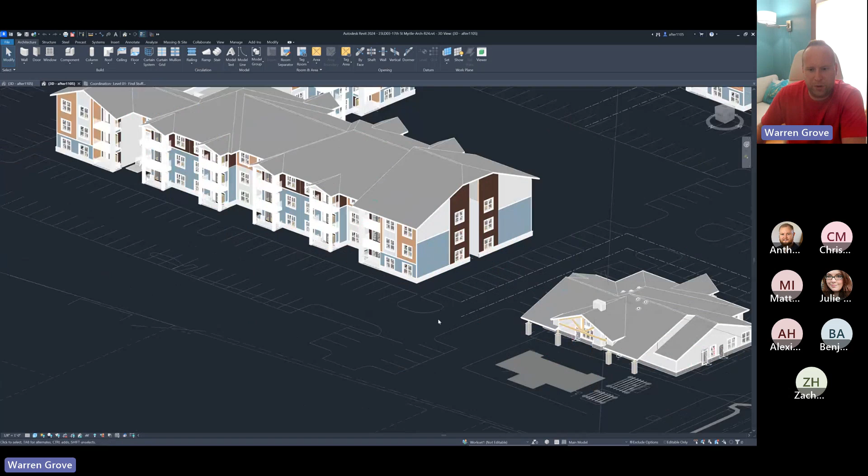Perfect, let's go ahead and dip in. So we've got groups for units. We keep an inner layer that is the interior guts of the unit, and on that we build the first floor. Then we build an outer group that includes the shell of the group, meaning the exterior walls, exterior wall finishes, windows, and porches. I think I've said that right. Yes.

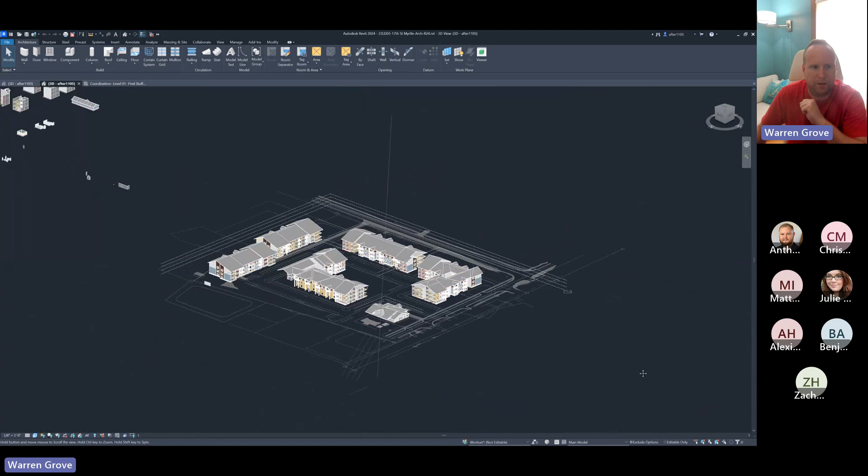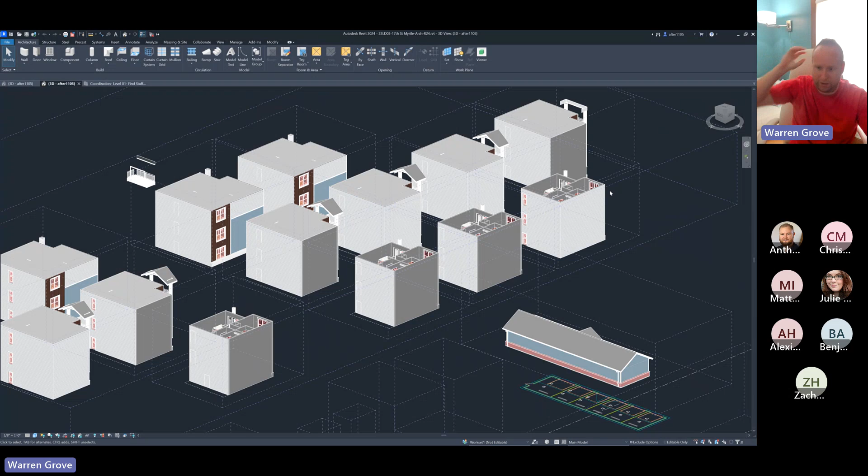The essence of that - if we were to, I've got my scope box on... no I don't, right. So if I were to ungroup one of these stacks, you see we keep every single unit as a stack - the ADA units, the standard units, any modifications to those original units, which we'll get into in a minute - everything should remain in a group. Another way of saying this, less politely, is don't explode the groups.

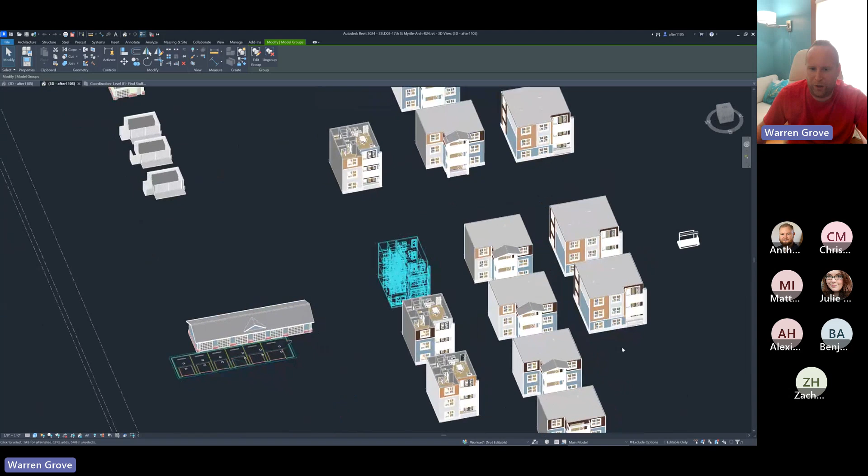No breaking of the groups ever, ever, ever, ever, ever. In fact, we like to usually tell people when they start to not muck about with the units at all. That's the project manager's job, to understand the rules and laws associated with those units. While that's correct, it's still important to be looking out for things that couldn't possibly be right. If you see anything weird, let's talk about it. Don't be silent, always say something.

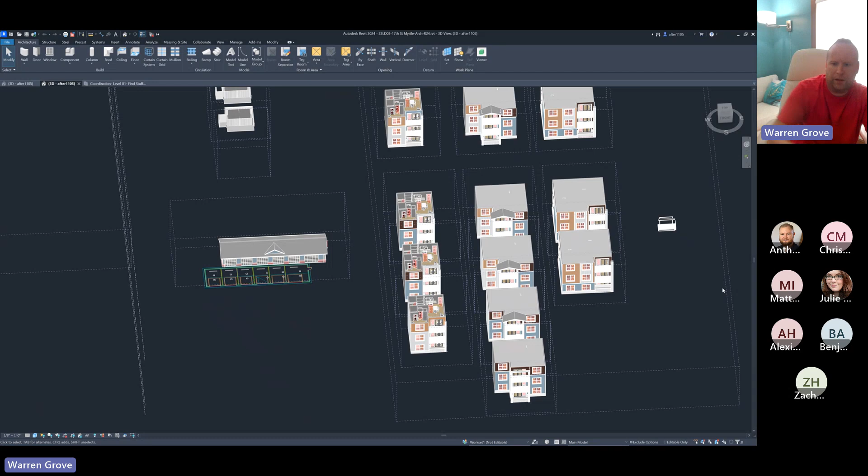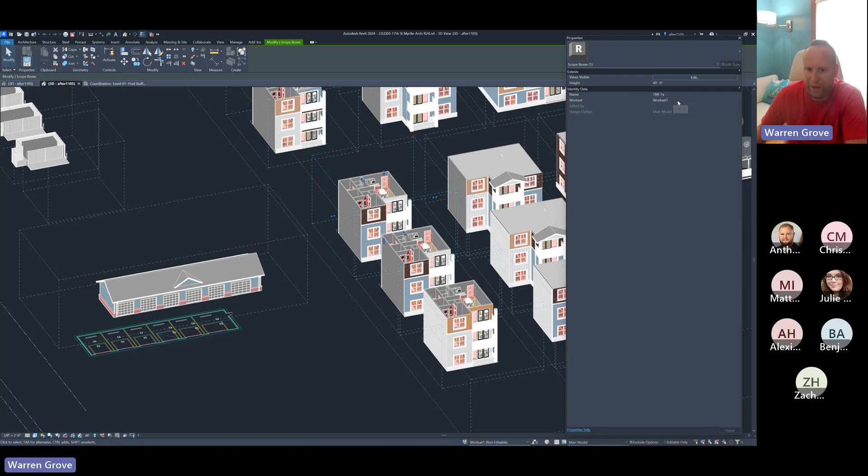Sometimes you'll probably be asked to do another group. So we have scope boxes - are you familiar with scope boxes? I'm assuming you are. Sorry if this is a bit reductive, but we want to make sure we don't miss anything, since everybody comes in with a different level. Gosh, do they ever, and you never know what holes are there. The scope box name - one of the big things you'll find out is we want the unit name and the scope box name to match. We just don't want a bunch of different names for what is the exact same thing.

When we build these units, the other thing we try to really make sure we're coordinating is the insertion point - that's this X and Y little guy. I don't know what Revit actually calls it, but you can move it around. Insertion point, perfect - we like the origin point. We'd like, in a perfect world, the origin point to be

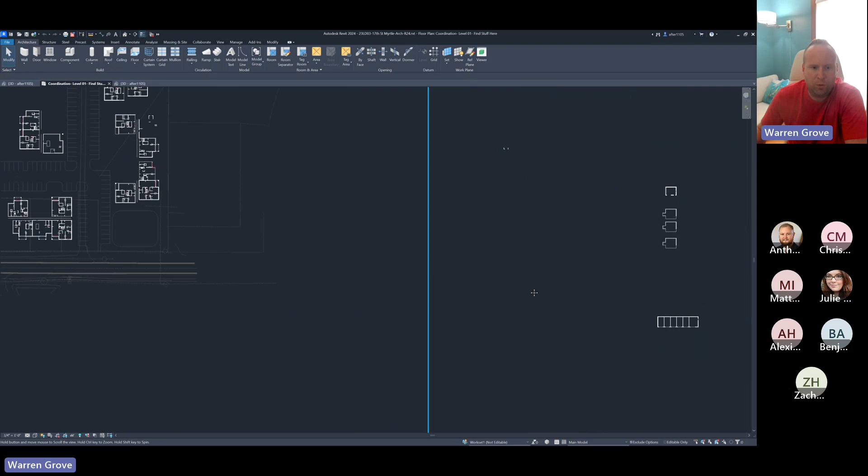the same point wherever possible, whether I'm doing a corridor building, garden style building, or townhome - it doesn't matter. The idea is really simple: if your origin points are all the same, it makes swapping out stacks of units super, super easy.

So let's say that this unit, for whatever reason, I actually wanted it to be a 2D. Ideally it would not move at all - we'd just be able to swap in a 2D unit, and that unit would change at that particular location. To add to the origin point, you also want to make sure your axes are pointing the same way - the arrows, that's right. You can mirror these units when building the buildings, but as long as you start with the X and Y all being the same orientation, it should be good to go.

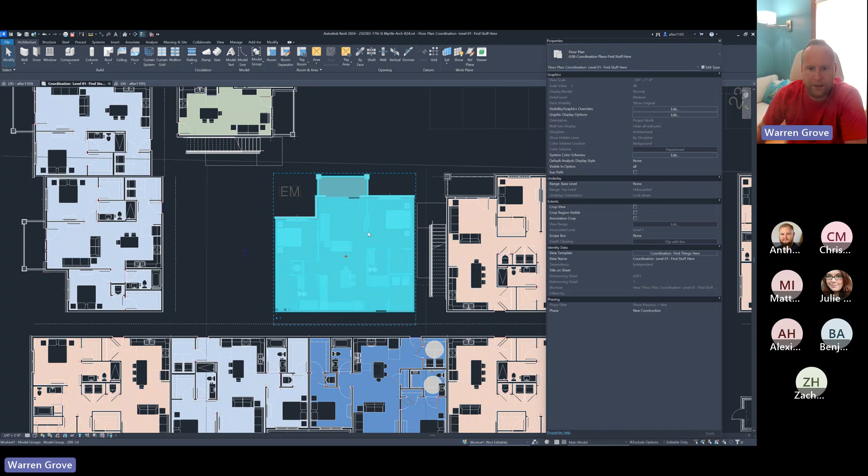See, there you go - and that's now a 2D unit, but it should not have moved at all, which is perfect. So I'd put that back as a 2C. In fact, I'll go ahead and just undo that now - don't want to break the current model we're all working in.

Other things I like to see with the units - you might notice some dashed lines. Those are important, especially when you're building corridor building units, but they come in really handy even when you're building a garden style unit.

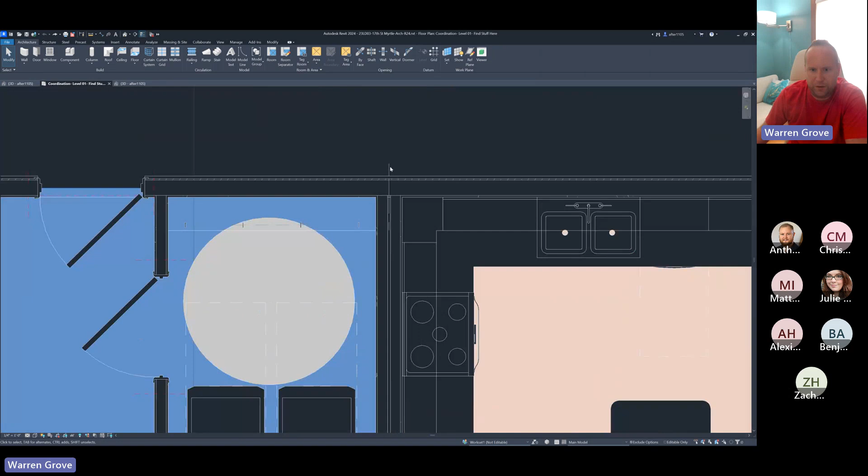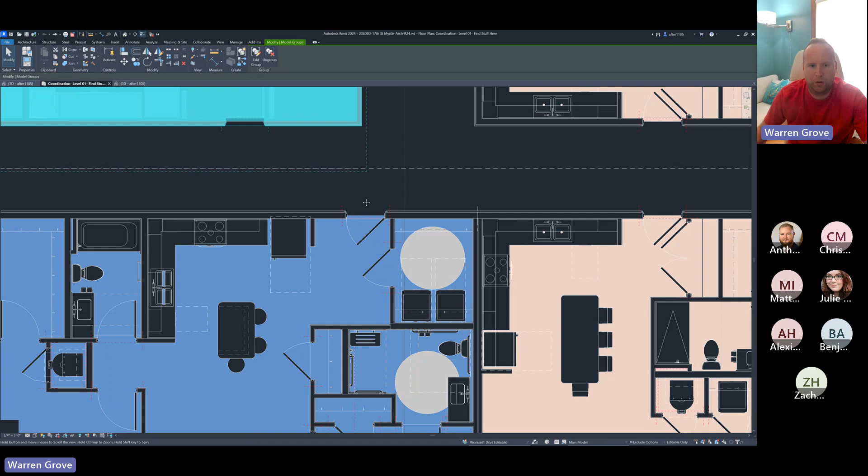You'll see these little tick marks, little vertical lines. We want those to stay where possible. For our wall type, we build these at 1 inch apart, so having that mirrorable line is great. I also do one when I build a corridor, having a mirrorable line right down the center of a hallway, so I can visually see if something's not lined up. It makes it much easier to see that, so we avoid potentially having mistakes as we build.

I hope it does. The reason we do it this way is inevitably sometimes things change. You need to move a building around, and the way the corridor teams in our office do it, they basically ungroup a lot of these groups for a variety of reasons, none of which are good when you think about it long term, but they do it. Then when it's time to move the thing, when the owner wants something different, it makes it so much harder to move everything.

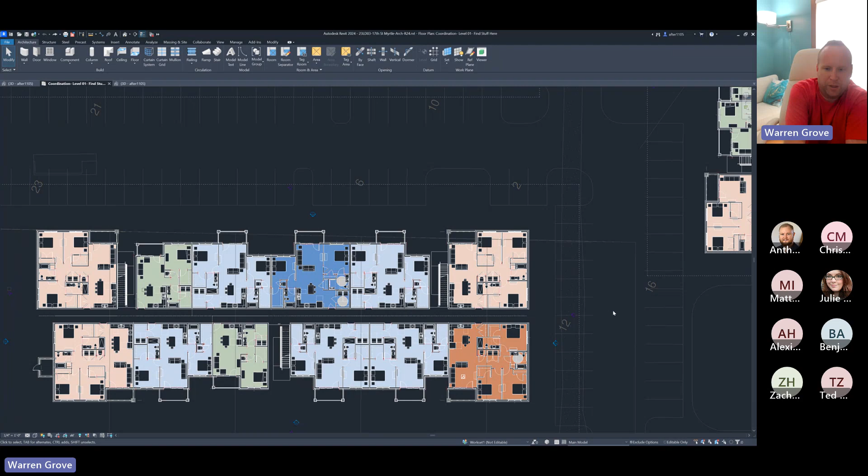Right now I can just click and drag these things, and not only does the stack of units, all 3 floors, 4 floors, whatever it is, move, but the trim, the siding, everything goes with it, which is wonderful. It makes pivoting possible, even better than it was in AutoCAD, because then the elevations are half drawn for you already. That make sense? Yes, it's very useful.

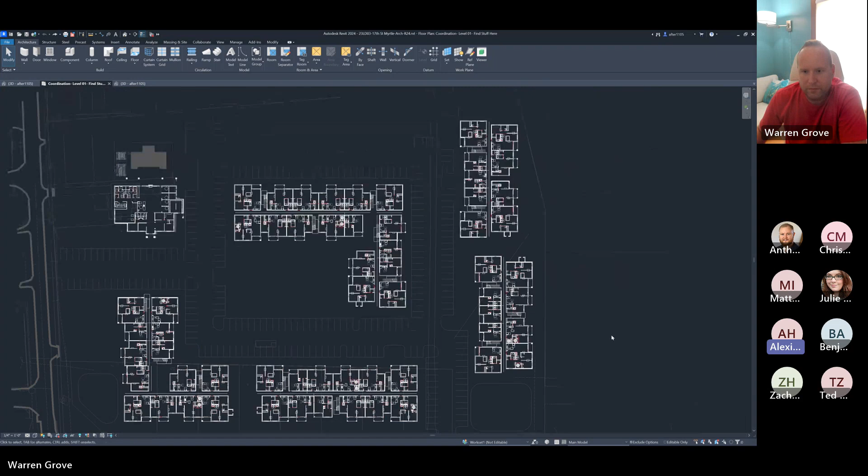I haven't seen that done before. It's just one of those rules of thumb that they expect everyone to know at my previous firms, but this is a lot easier.

I think the challenge is people don't like doing this because they've had trouble getting the groups to be stable in the past, and that stability issue is caused by a variety of things. We've learned, in particular, we had issues with the tile floors in the bathrooms. We got rid of those and all of a sudden stability returned to one of our models. So we've worked very hard to identify pieces and parts that cause these units to not be stable and not work the way they should, and gotten rid of them.

Been a years-long process. Chris hasn't suffered at all.

If you're running into problems, the best advice I can give you is just stop, think about it, and call one of us, let's put our heads together and figure it out. But I'd say like 75% of the time, it's a face-based or wall-based item that's in, say, the interior group, but hosted on a wall that's outside of that interior group, which you can do, but it's tricky. We try to avoid it when we can.

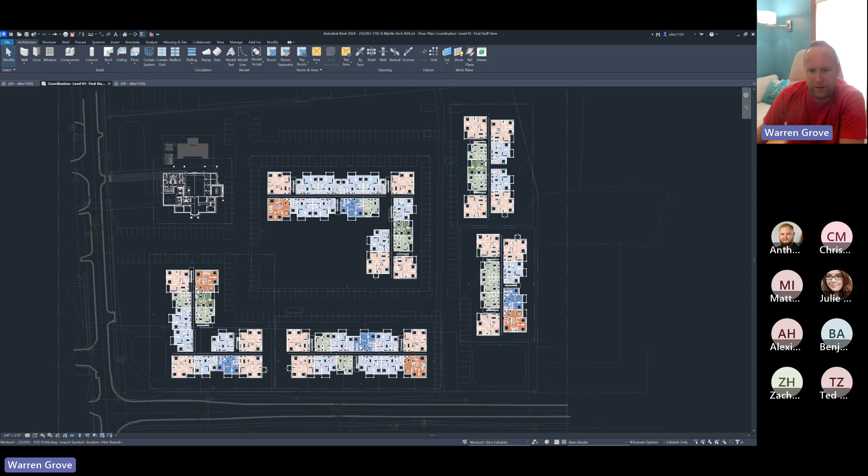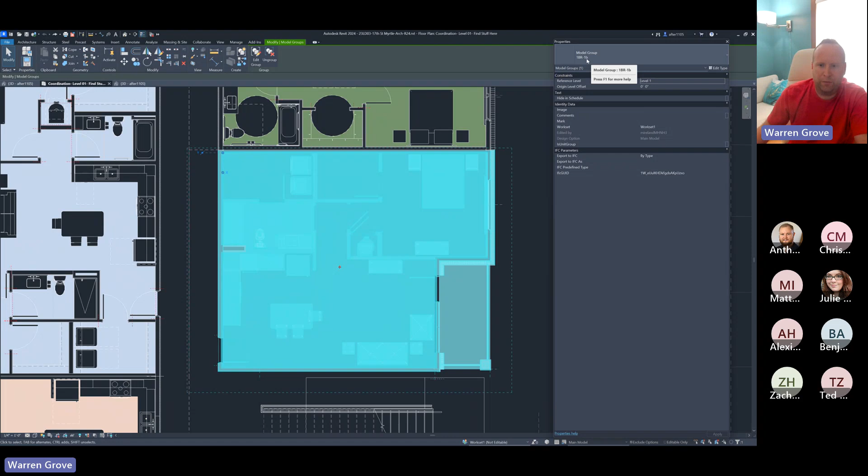100%. So let's talk about how this draws up before I forget about it. So this unit, this is a 1BR-1b. We'd like to keep it always the same, where the lowercase letter tells us something very particular. What it's telling me, ideally, is that the interior guts of the unit are exactly the same as a 1BR-1 lowercase a or lowercase c or lowercase d. The naming convention is super important - it just means the interior guts of that unit have not changed. For this one, it's pretty self-evident what's changed: this wall along the living room is a 2x6 wall because it's an exterior wall facing a breezeway with a stair.

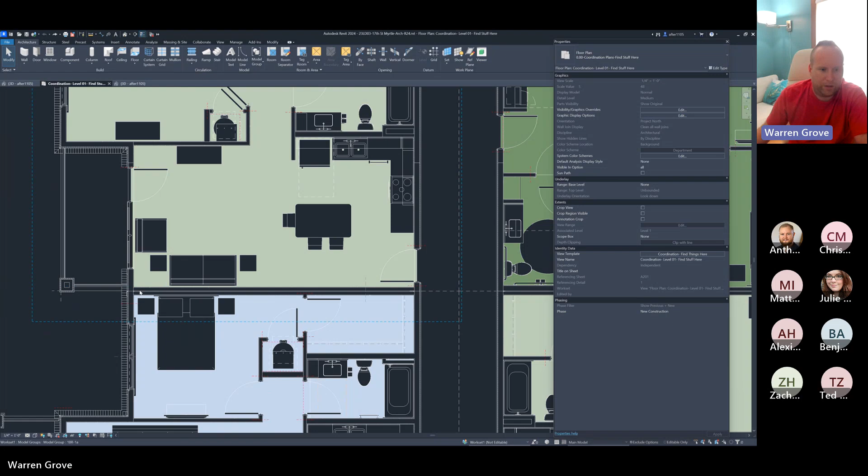As opposed to - I probably won't be able to find a 1BR1 unit. Yeah, here we go. Here's a 1BR-1A where it's a 2x4 wall, a demising wall separating units, which is a rated wall. You can see that that's changed - that's the only change. And that's super important to us, that the names should tell us a lot.

And it's super important to us because then we can do clever tricks when it comes to the drawing package, like this - we know a 2BR-2 versus a 2BR-1 based on the naming convention. Of course, this is doing something a little bit different, so bear with me, but the essence of it is we know the guts are the same, so instead of drawing it twice, we just refer back to the one unit, which is here.

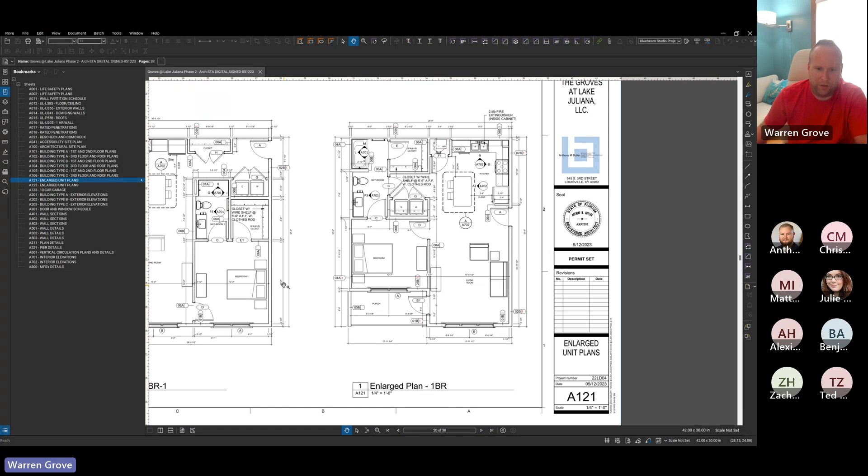So we cut down on a whole lot of errors. And then we only go through the process of tagging the exterior walls or the exterior conditions, which is what has changed in this particular case. Sure. Does that make sense? Yes.

Okay, and this is important because it's not that hard to just group everything and have it live in both unit plans. It should be relatively easy. But the day those two unit plans become 99.99% the same and not 100, we get questions, and that costs us time. You know what I mean? Right, so it's easiest just to have everything done correctly in one place, and that saves on coordination.

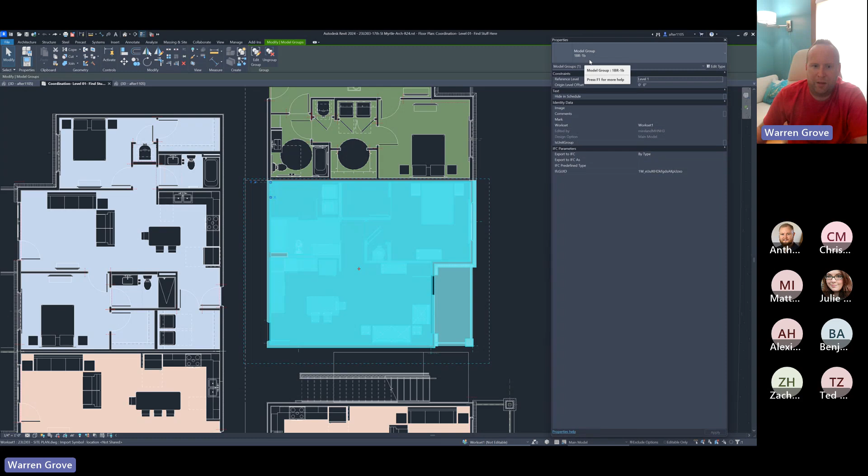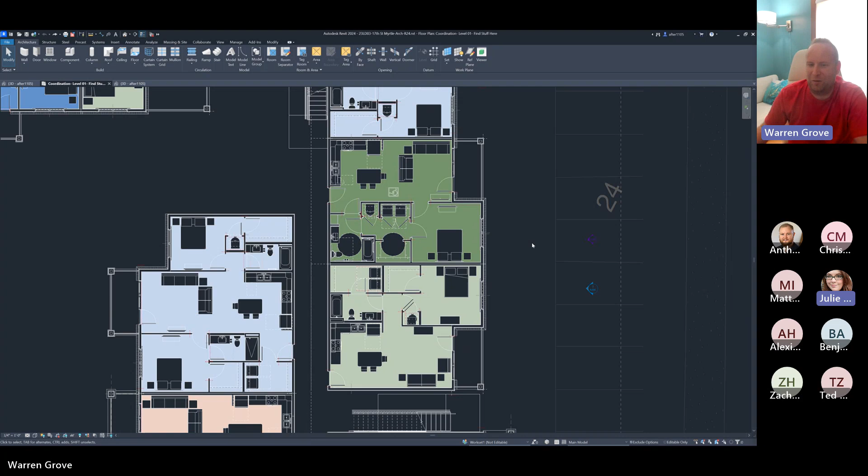Correct. And I think the flip side is true. If for whatever reason we knowingly change the inside of this unit, then the naming convention should change. As you work in the firm, you'll get used to how we name things, and you'll intuitively know without having to investigate what I was thinking when I made that particular item. In a perfect world, it will work every single time without fail. There will be no exceptions to that rule whatsoever.

Promised. Let me ask you a question about this stuff.

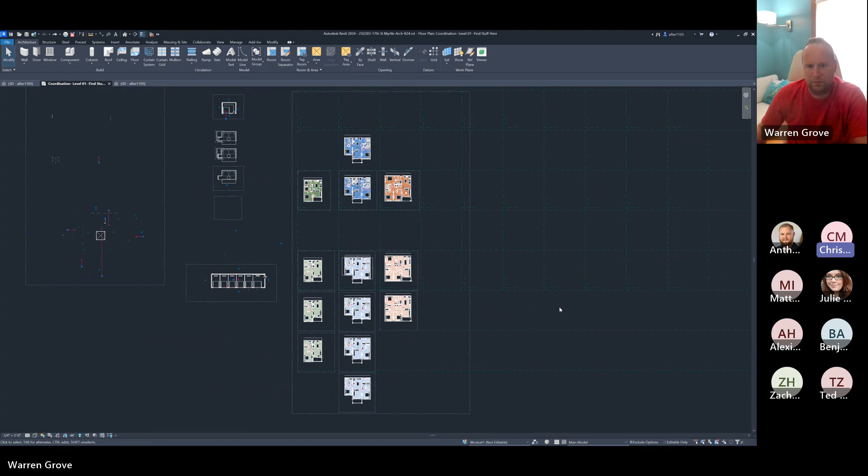Can you show me your layout here? Yes. So you're gonna have, okay. I'm guessing the top four up there are what you have actual unit plans for, and the bottom however many are just sort of modeling. Right, so the way I'm dividing this up, these are the three core competency units, and these are the three ADA versions of those units. And then everything below it is useful for building the actual model, but doesn't actually show up in the enlarged unit plans insofar as the core.

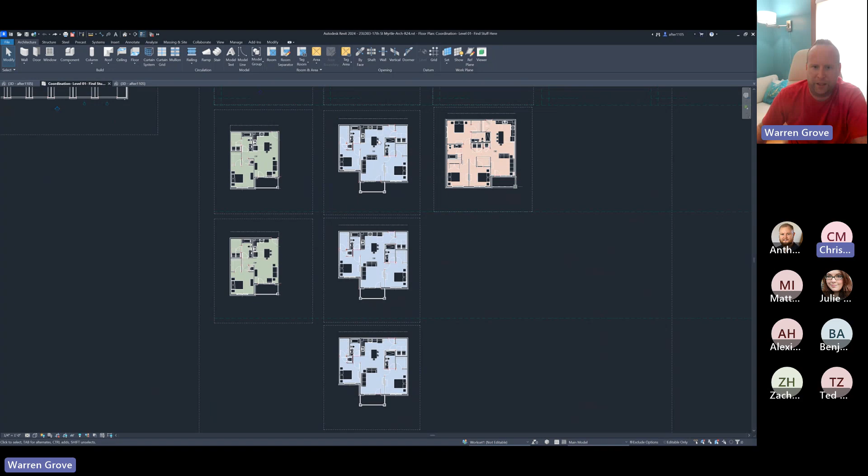Yeah, that's basically how we started doing it too. I think Ben moved them to the right instead of right below, but I actually don't care how you set up your layouts, just so long as... me neither. I do care about the colors though.

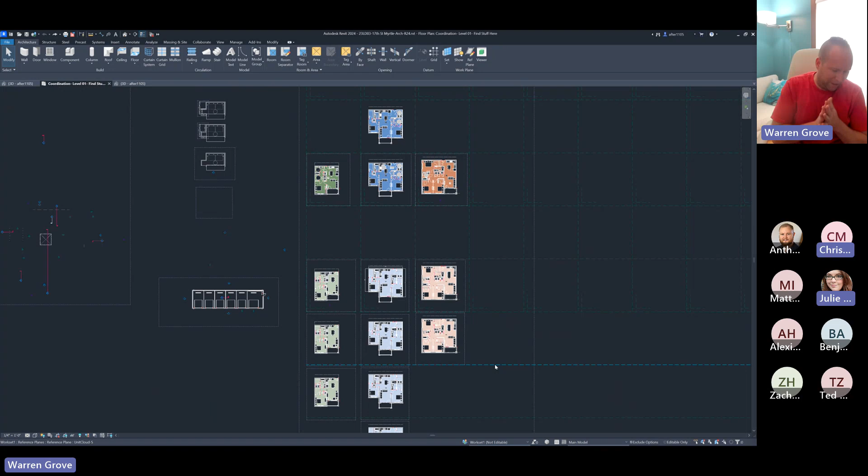You probably noticed there's, we'll call it green, blue, and what did we call it, Julie? Dead salmon. Yes, hey now, that was my term. And it's a beautiful term, it should forever be enshrined. Who made fun of me for that in a meeting with you and Vadim? Was it Michael Gross, somebody? Somebody abused you maliciously for things that had nothing to do with you, and it was the greatest day ever. Yeah, right, but I digress. Chris took it. No, we won't. The point is what we're losing, we're reining it back in. Sorry, we're bringing it back. No, if we can't have fun, there's no point.

The essence of the teachable moment here is that it's probably already self-evident that the 1BR accessible, the 2BR accessible, the 3BR accessible, however many there are, to help it pop on the page and be easy to understand where they are and how many there are, is a derivative of the color. We just want to darken whatever that color is for that unit, right? And all this is handled with color schemes on the coordination plan.

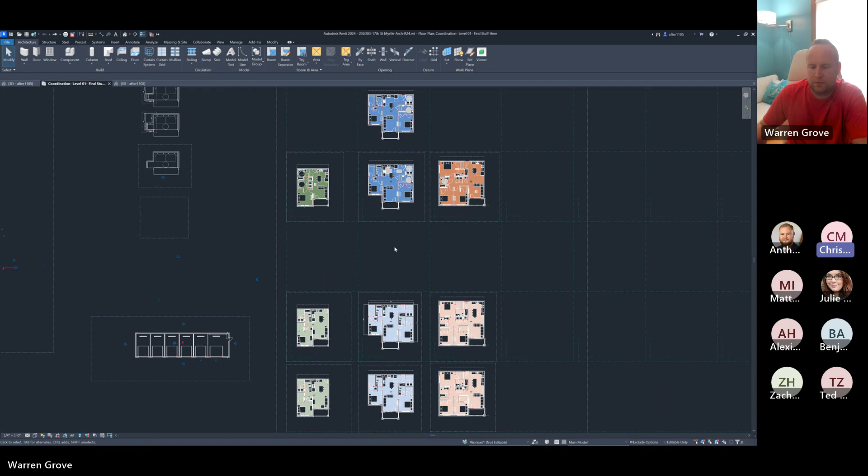Yes, yes, yes. And then most of the time they'll color the room, not the tag, the room. We'll set a department for when we add those rooms into the units. And you modify and check that by going into the view template, clicking on color schemes, and then it'll be under the room subdivision, should be called department color scheme. It should all be right there. And ideally this is all already set up for you, and you don't have to worry about it, it's just sort of automatic.

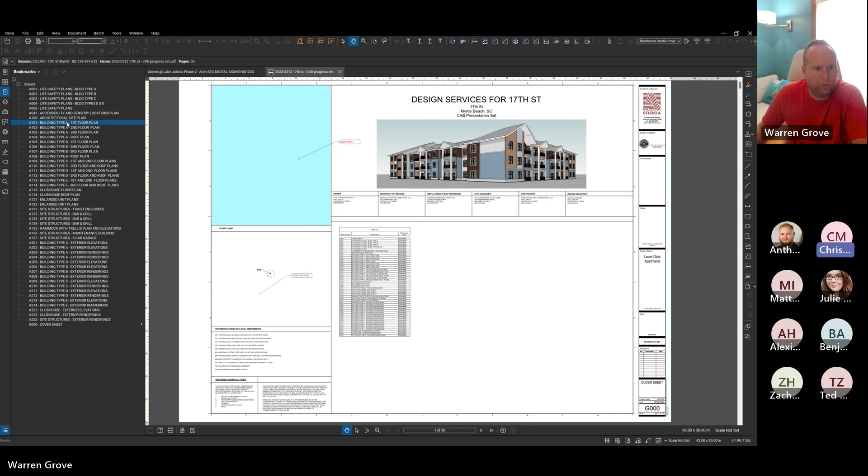So here's a good application of it, right? This is what we used to do for several years, just the good old black and white. And we're trying to get away from that, trying to do it even on standard garden styles. Yes, even on standard garden styles. Thanks for telling me. I think it's gonna print gray whenever anybody prints it, but the world... yeah, I agree. That's why historically we didn't do it in the past, because it would print gray.

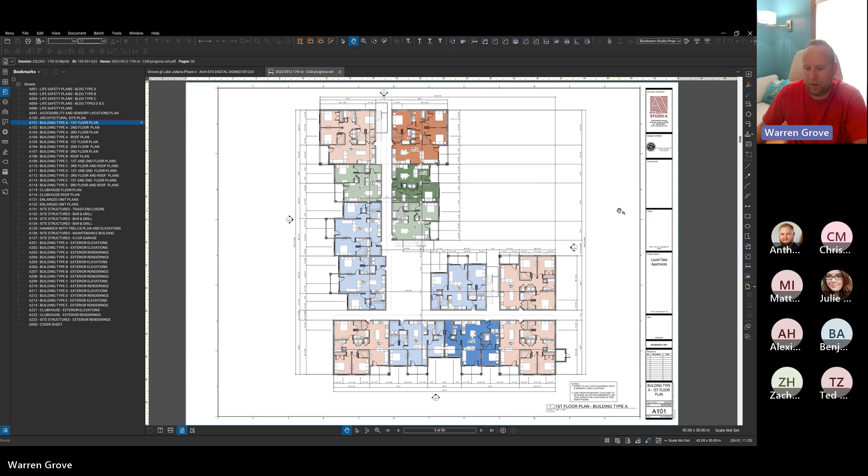But the more we do this, the more people are just in Procore anyway. Yeah, so that's fine, and this is a good moment.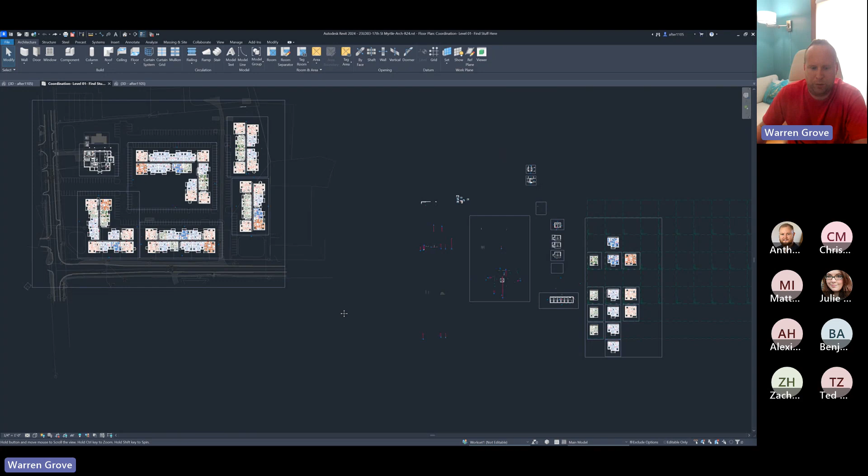While I have this up on the screen, this is a common question: how do I keep from having 10 million different versions of a unit? How do we keep it simple? The simple answer is jobs - do simple jobs, don't have 10 million unit plans. And then job number two is hacks.

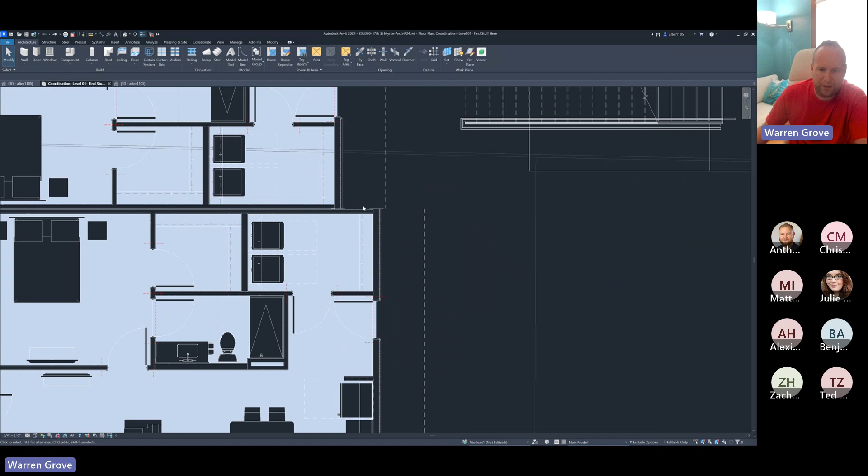You probably noticed that this unit and this unit are pretty much identical, except this has this 2x6 wall down here. When I have little jogs like this, instead of creating an entirely different unit for something with just a little niggle of a bump, I'll just let this be the same unit, and I'll draw a 2x6 wall over it and tag it in the overall floor plans. I won't go through the trouble of making an entirely different unit type for 2 feet of wall or whatever it is.

Same for this little guy, I'll just make a big deal out of it on the floor plans. As long as you're communicating that clearly to the contractor - hey, do this little nib right here, make a note of it - then you're going to be fine. If you don't tell the contractor, that will get us in trouble. So it's a decision we've made, that we're just going to pay attention to it and get it right. Make sense?

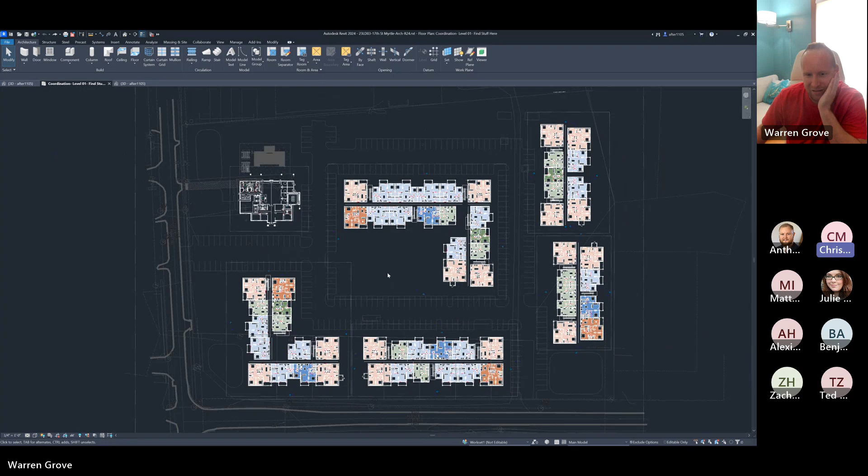Drawing is like writing sometimes - there's a number of different ways to say what you want to say, and some are more clear than others. But at the end of the day, you're just trying to say what you want to say and communicate what you need to communicate to get the job done.

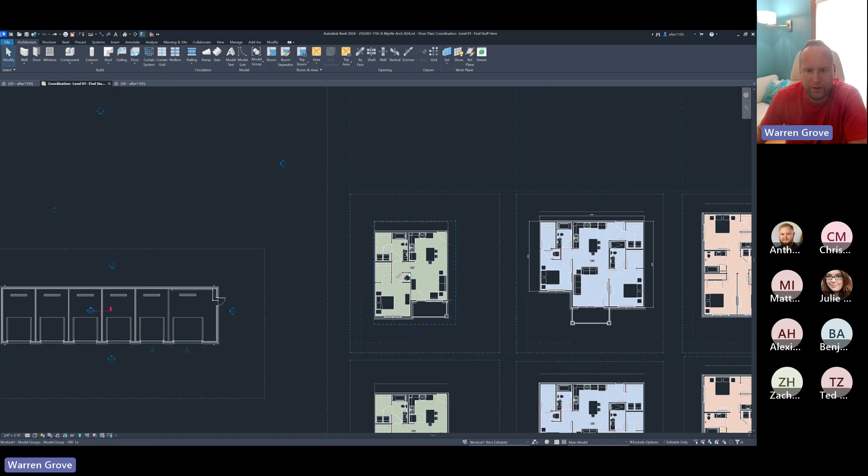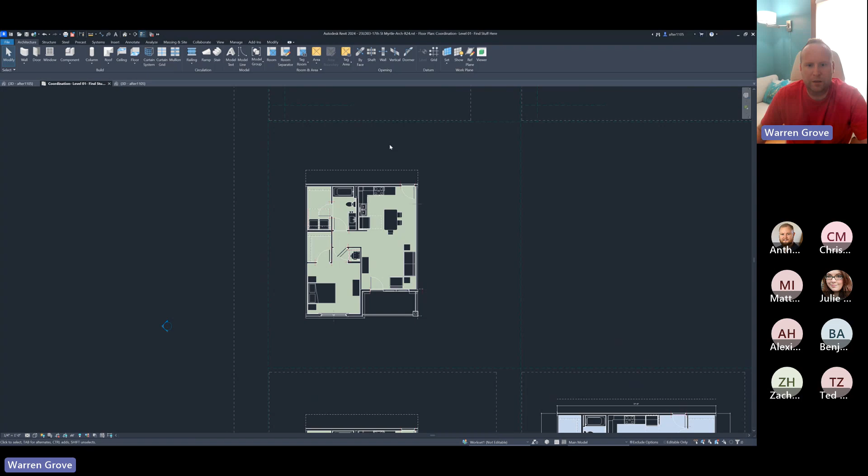Final-ish things - I think I've said this already, but if not, I'm going to break one of these groups just to reiterate this. Give me a second, I don't want to break this original one. Go up here and do what we said we never do, which is ungroup. And now you can see that interior group. I just want to make 2 points.

First off, this is the 1BR interior - you'll note that name, that's how we like to name that, keeps it simple. And it's a big thing for me that the apartment door, the patio door, the entry door are part of the interior group. That's a huge thing, absolutely.

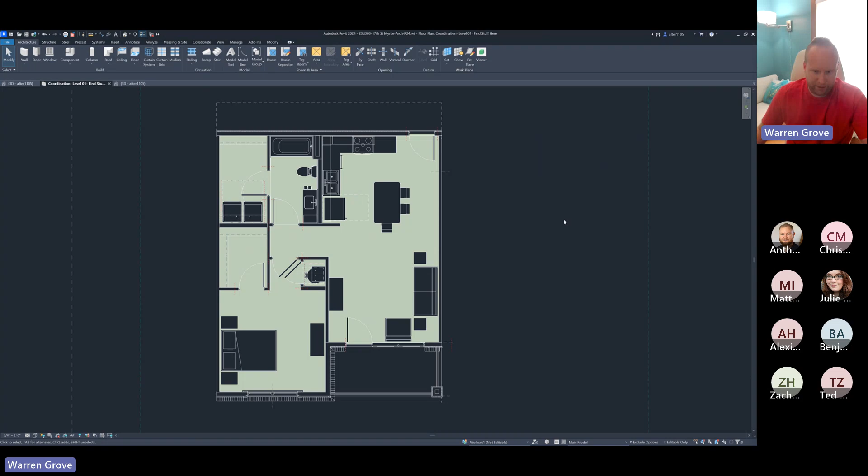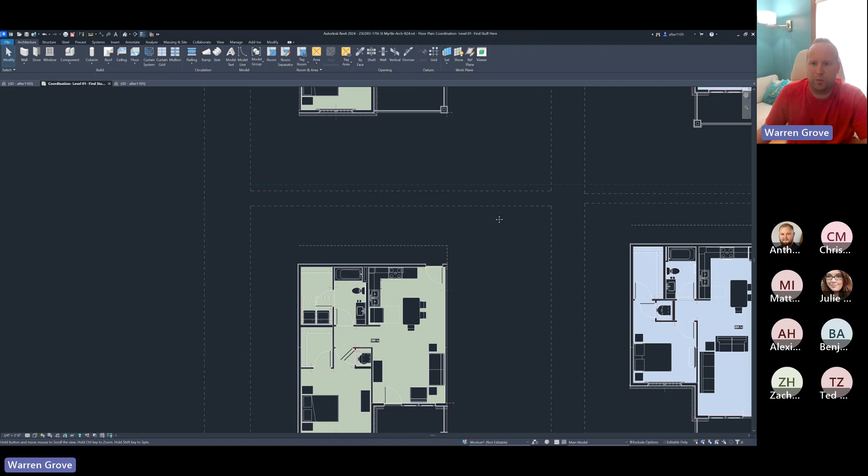The reason I want it like that is that if it's not part of that interior group, I get constant issues where the enlarged unit plans, which show this group, don't match potentially the swing of the doors for the outer group. Or somebody changes one of these outer groups, either consciously or unconsciously, and then it becomes a conflict in the drawings. The general idea is that the units on the right need to talk with the units in the building on the left - they need to be the same.

You can see here, now that we've ungrouped it, we don't do a stack of 3 - we don't do groups 3 layers deep. This just gets copied up, so here's, for however many floors, and then that gets all stuffed into your exterior group. And then again, we do the trim as necessary.

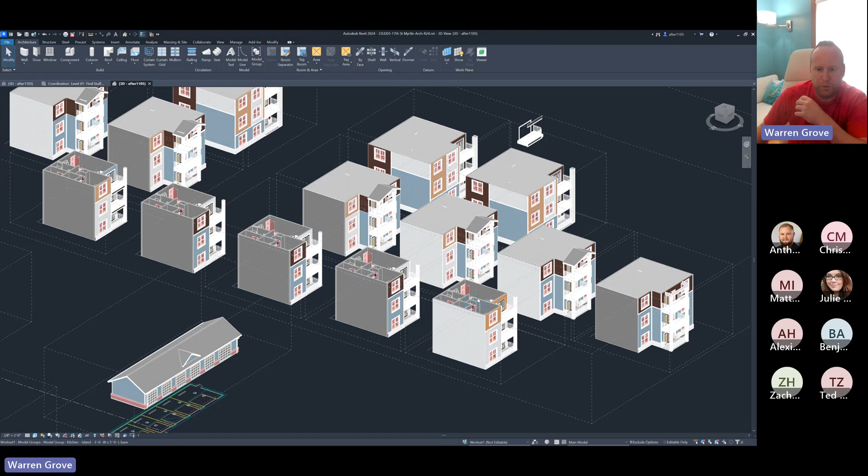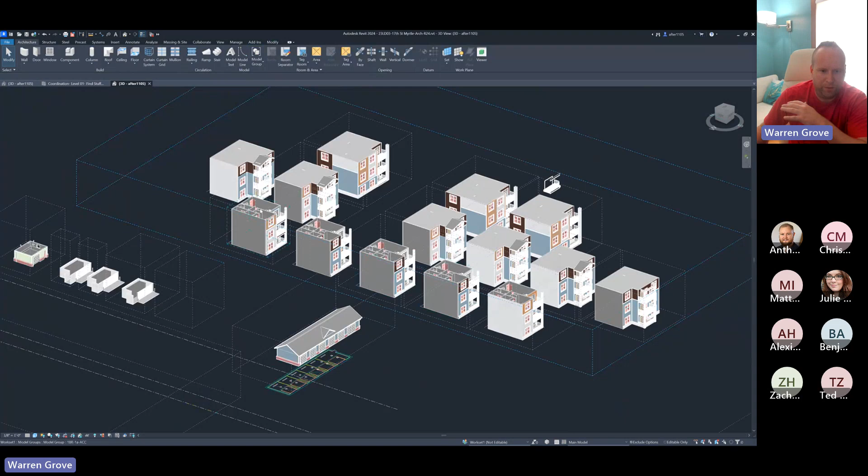So, a couple more tricks that I like to play, a bit of a design hack. Because you get a variety of unit groups, I can add diversity to my facades by doing like group 1B - the facade is different than say group 1C. And then the facade could be different for my accessible units. What that does is it allows the buildings, without much effort on my part at all, to look like the design isn't just a big symmetrical cupcake.

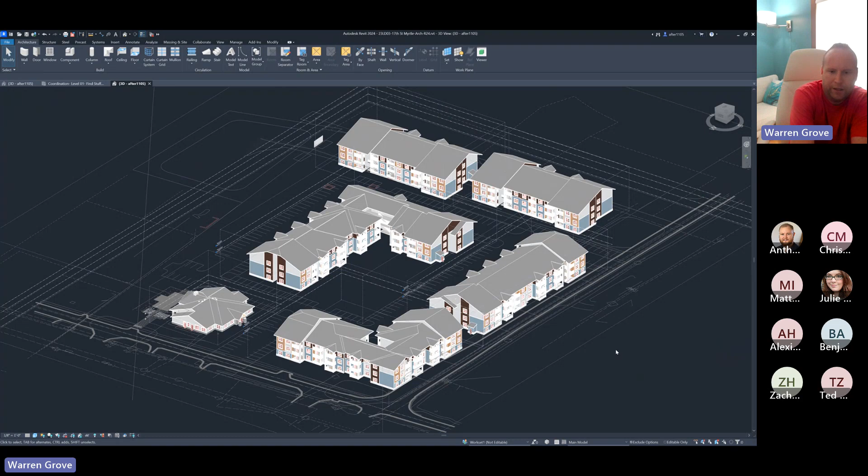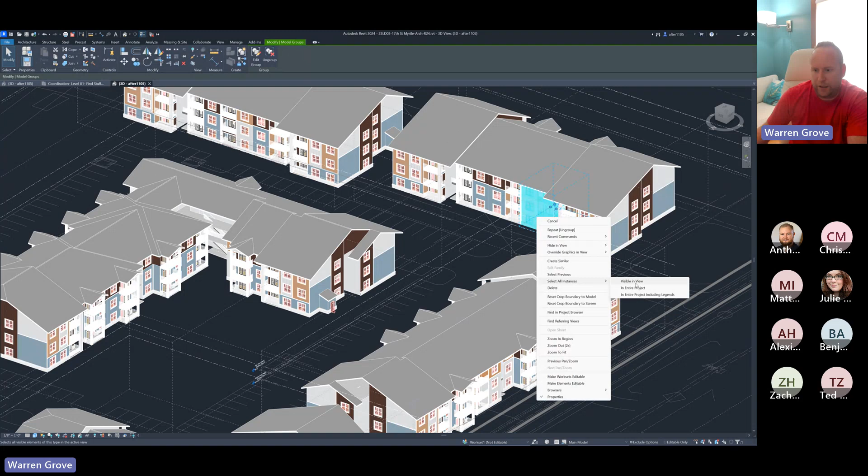It has a little bit more variety when it comes to the facades, which to me is pretty nice, and I don't have to work very hard at it. Changing that facade is very, very easy - if I were to change the facade of this unit, select all instances, it would just change these pieces, parts. As a design tool for speed, that's been incredibly useful.

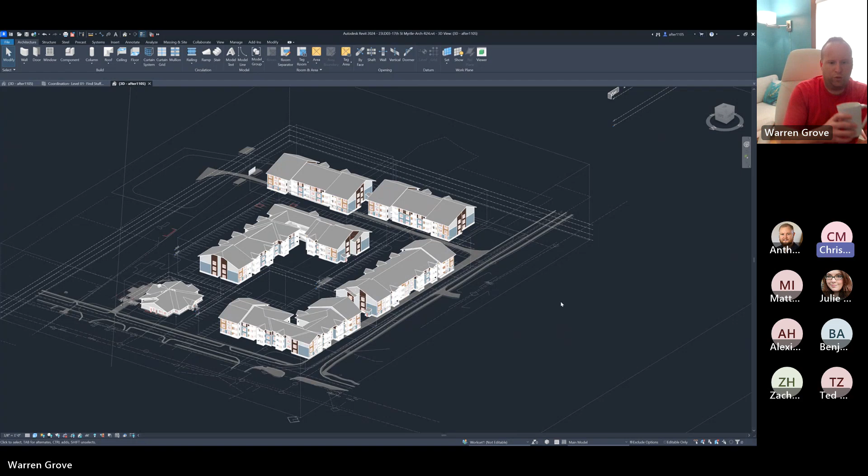All that being said, our average job is a little less complicated than this one, I'd say. We'd have fewer units, most likely. Usually it's just 3 or 4 standard units and then 3 or 4 corresponding accessible units, type A units.

I just want to stress, because you never know who gets to stay on our team and who gets sucked into corridor land - and we're doing it with several corridor buildings on our group right now - that this process works even better on a corridor building.

So let's say on a corridor building, I wanted to do - like I said, let's say I had a very special design that I wanted to do on the entrance to the building, right? Just some hypothetical thing.

It's very easy to lay out your building schematically as is. And then you could select - I think you could remove these facade materials. Like, let's say I wanted to do a totally different corner on this unit, right? You could either create a new corner unit group, which probably would make the most sense.

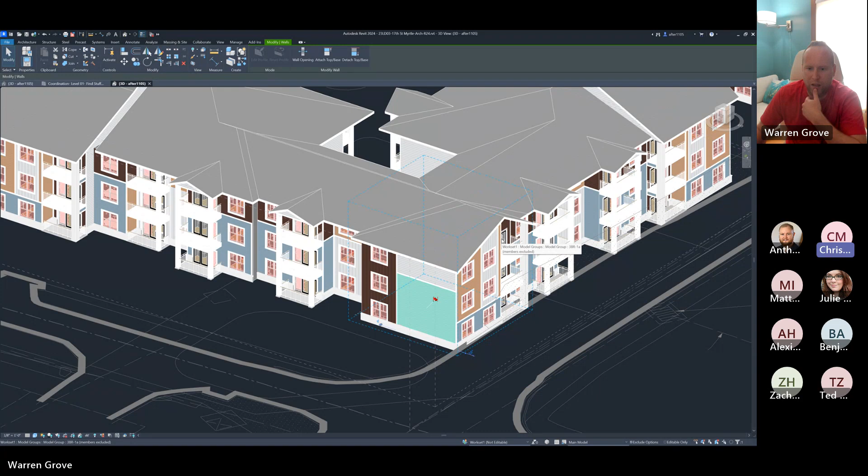If you've got to use it multiple places, yeah. Well, even if you didn't, just having it as a group, because then I could - again, the whole idea is to be able to move it later. The horror of a corridor building, the absolute horror, is when you go in and moving it is impossible because they've ungrouped everything. It's a nightmare. So I'd leave it in a group and just have it be a different group.

But there's also the idea that you can just select this stuff and remove it from the group - hit delete, and it's still there, it's excluded from the group. Hover over it for a second - see, it's still there, but it's removed from the group.

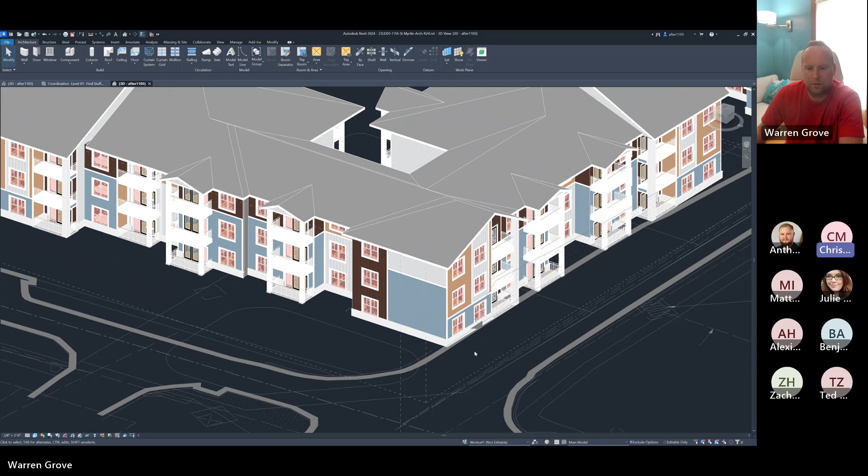And then you can restore all excluded if you want to put it back. I get leery of that - it's had issues. It's just not there, it's ghosted, and that I don't like.

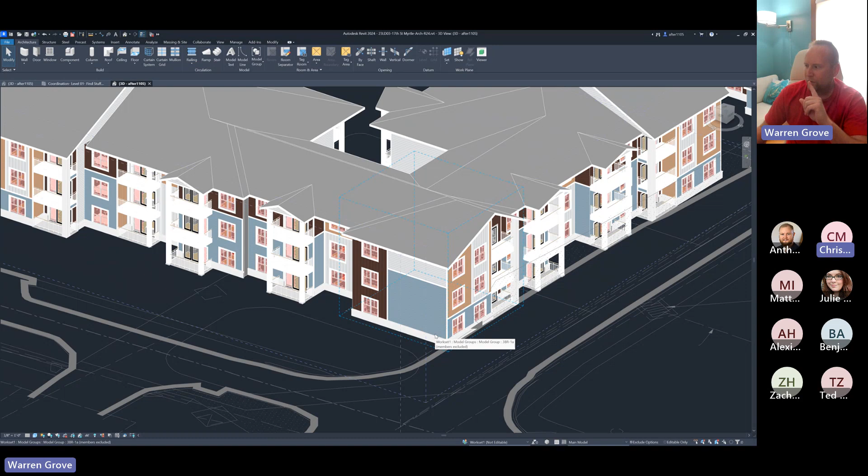Okay, I see what you're saying. What I'm trying to say is, in the past, people have hidden stuff that's in a group. That's what you do - you just click on it. As long as you're not in the group, if you're just sitting out in space like you are right now, you select it and you just hit delete.

Or exclude, right? Yes, that's the same thing. We don't like doing that. We don't like doing it because they exclude it from the group or hide it in a particular group. That was investigated for a while and it caused more problems than it solved.

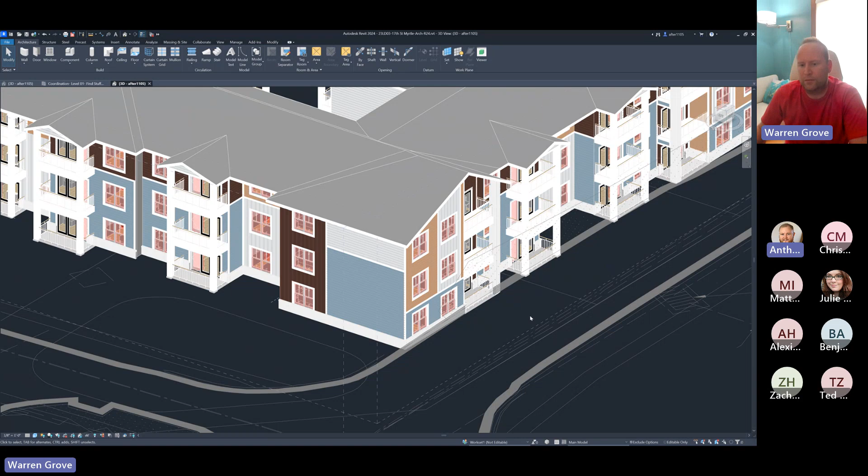Hey, I've got to drop real quick, I'm getting a call. No problem.

I'd just say that was looked at and it just did not go well. We were hiding things all over the place. It was not good.

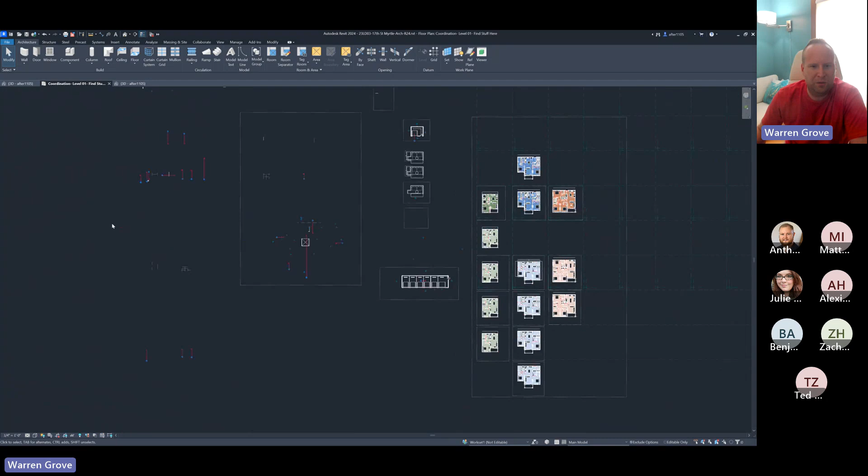Final thoughts: stairs can be tricky, and stairs and hand railings can be tricky. We don't like to bury those in too many groups if we can help it, because they'll typically get excluded. If you want stairs as part of a group, they kind of need to be their own little thing.

Let's see, I'm going to get out of this project and go to Anthony's real quick - Cane Run, just to kind of show you.

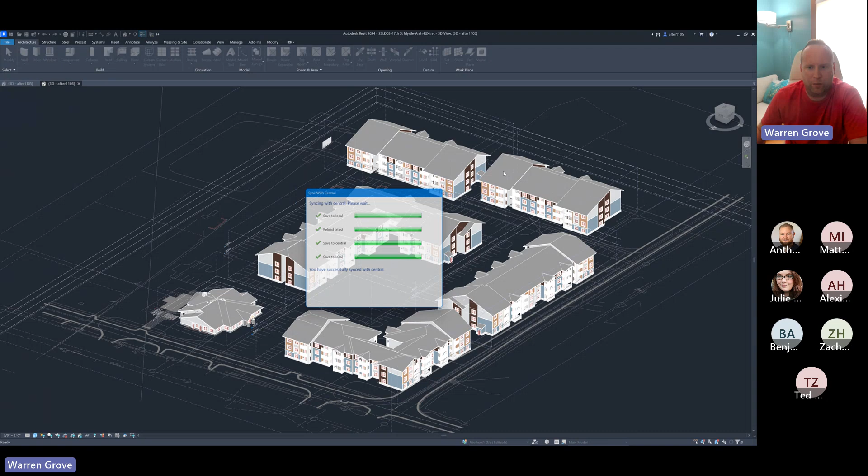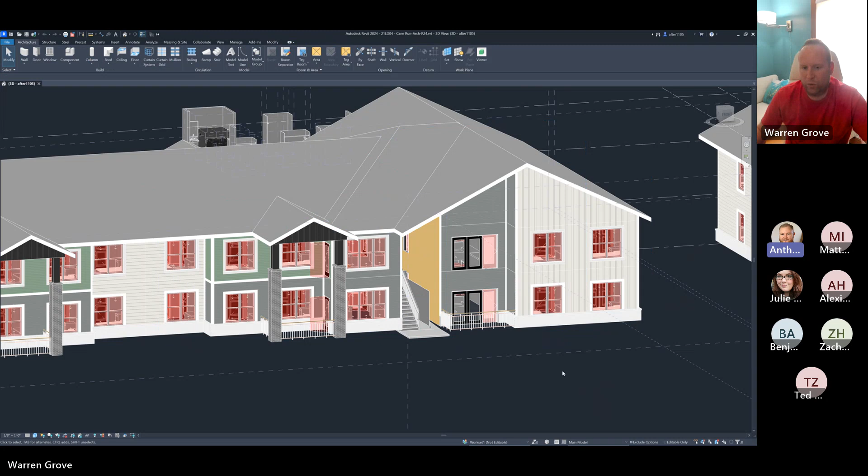He's got a little bit more work to do, but because it's a proper breezeway building, I wanted to point out that your stairs are separate from everything else. This is a work in progress, so you can see Anthony hasn't added the fiber cement siding yet, but that's fine because you can see the magic happen. He still needs to do the siding here, but the stairs and everything else are separate.

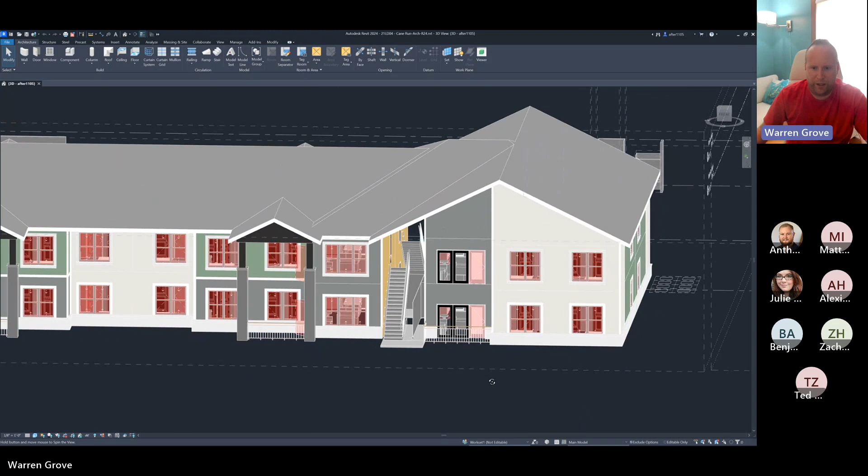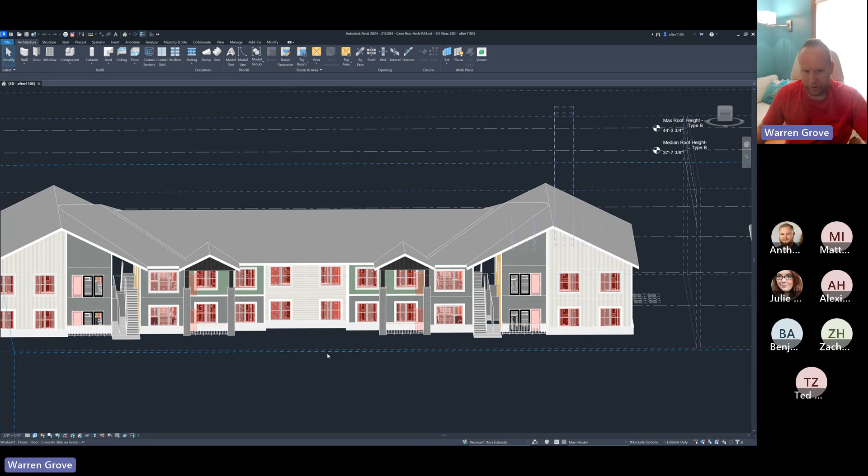If anything, Anthony probably could have these stairs be a group. We like that if anything gets copied more than once, we like to see it in a group, with certain exceptions. For breezeways, we do want a stair group, because if you don't have them as a group, they can get away from you in a hurry. You'll make a correction on one breezeway and it won't transpose to the other one, and you'll make a mistake just because you didn't use groups in the first place.

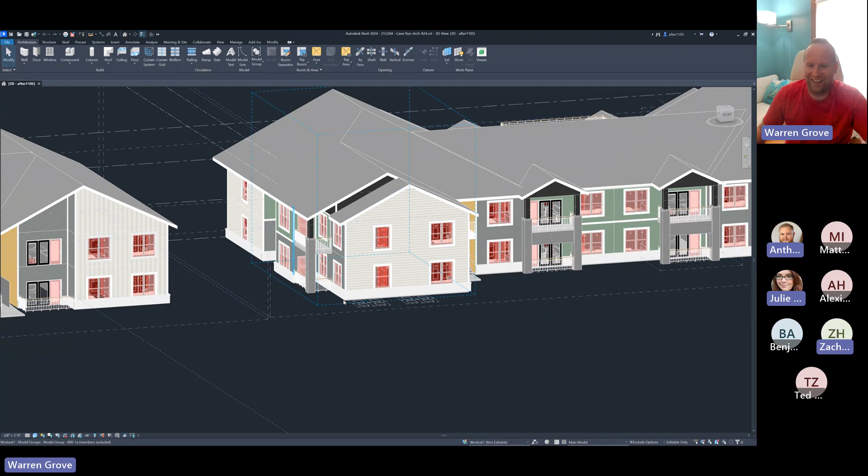Other cool tricks that we want to— oh god, Julie, no, that was Anthony. Let's say I'm not in the model. I want to point out that baseless complaint is now being recorded for posterity forever.

We have inside and outside trim, as opposed to doing a piece of trim on one side and a piece of trim on the other. And where possible, we want to use the corner wall sweep trim. That's just a given. If you don't know where that is, ask anybody on this group.

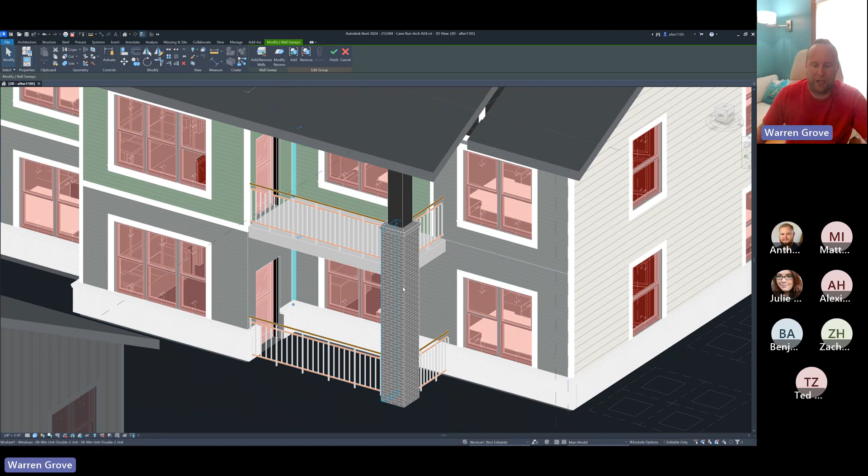This is just a regular wall sweep, and then we use it for trim. What some people try to do when they get to an inside corner or an outside corner is put one piece of trim on one side and one piece of trim on the other, and we don't want that. We want to just use this inside edge wall sweep piece. If that doesn't make sense, that's okay.

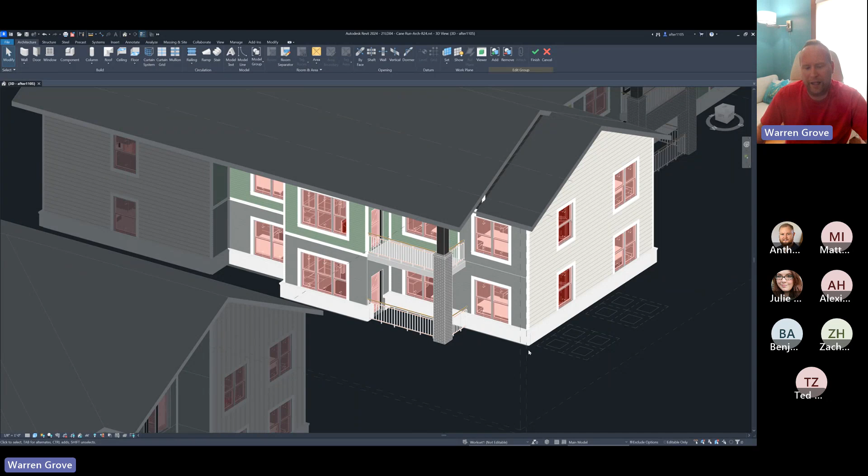Basically, because we use fiber cement for everything, we put trim everywhere. Trim was definitely corner sweeps, all of that. Perfect, awesome.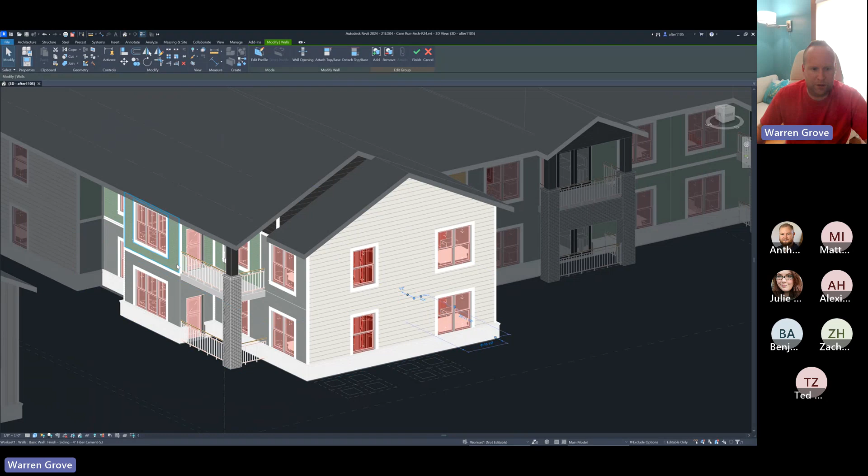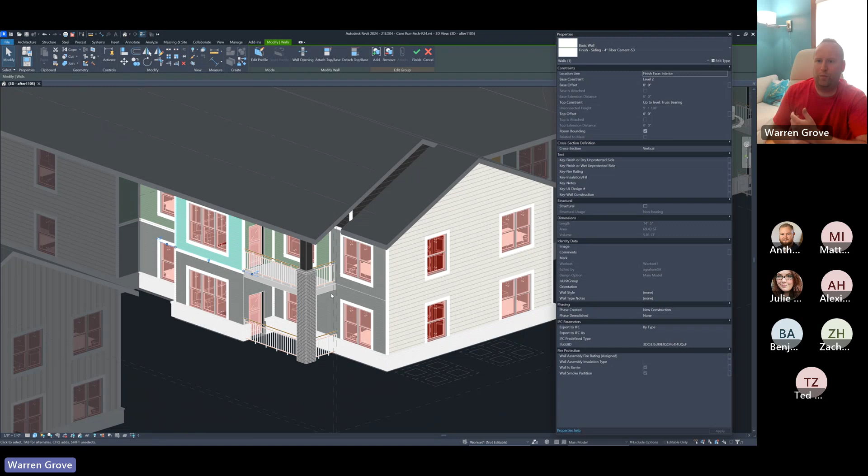Other things, especially when people start building siding — wherever possible, and this is for all elements everywhere, we want it tied to the levels. I don't particularly like, unless there's a good reason, doing base offsets and top offsets. You'll find plenty of offsets in our model, but we want to keep them to a raging minimum. So if I have to change the floor height for whatever reason, everything's properly tied to its correct level, which makes potential changes much faster and much easier.

Cool, cool, all right. Let's see, looks like Bryan joined. Hello, hello Bryan.

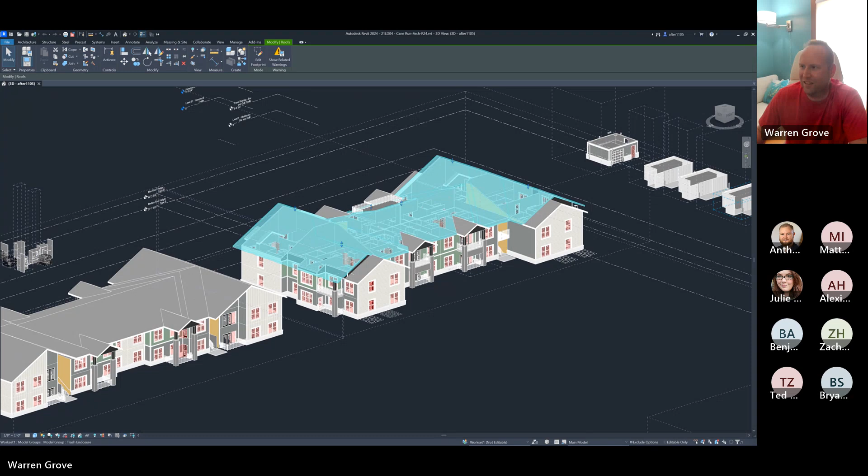Last thing, I guess, for me — I see this a lot. People do roofs, and instead of having it tied to truss bearing, I've seen people try to make roofs either offset somehow, or when they create them, they're tied to the walls, you know what I mean? I don't know how to describe it. I'll try to draw a roof here real quick just so you can see what I'm talking about.

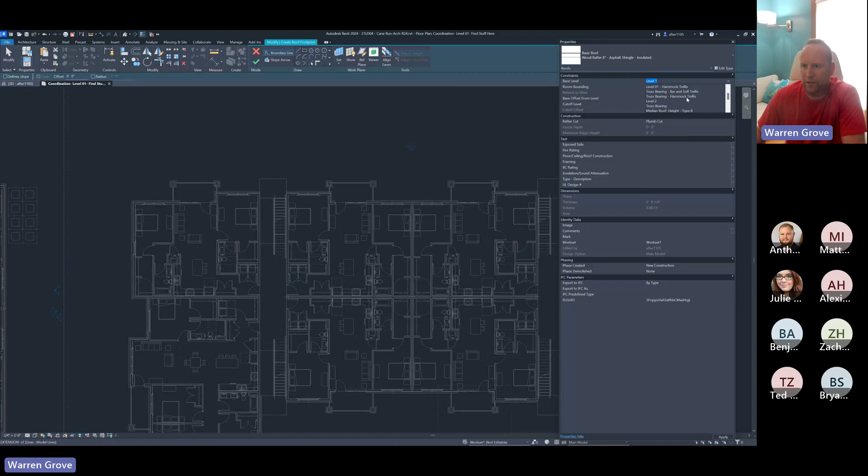So if I was drawing a roof, you get the option to pick walls and draw it. That gets screwed up in a hurry. I'd much prefer you just draw the roof, draw it tied to truss bearing, and don't do any offsets. Make sense? Again, there's exceptions to every rule, but that's the way you want to be doing roofs, in my opinion, my two cents.

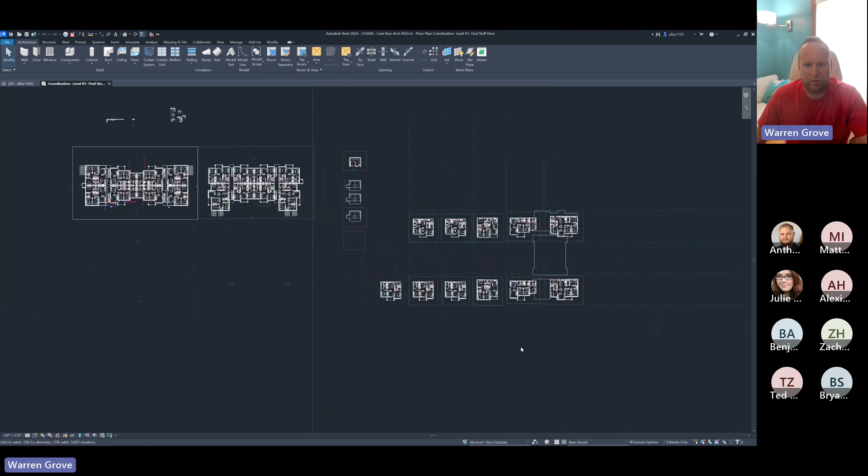Okay, all right, so there it is. That's my general tour of these things. Guys, if I missed anything, is there anything that jumps out as far as things you like to see, or mistakes people make when they start Revit modeling where we have to go back and redo it all?

Nothing comes to mind at the moment. I know, you'll think of it like two minutes after we hang up.

All right, no, go ahead.

Well, generally the biggest challenge for me when I first started was sourcing the right material, because we have so many projects going on that, whether it's project overlap or whatever, sometimes our template is not exactly the most up to date. So in that case, you might have to grab reference material from a project, and if that's the case, just do the due diligence when you go to grab it.

For example, if you were grabbing something from another project that's like 99% close, there might be one little difference, like they use a different shower type inside the interior units, but otherwise it's completely identical. So just remember, if you're grabbing from a project and not a standard file, put the due diligence in.

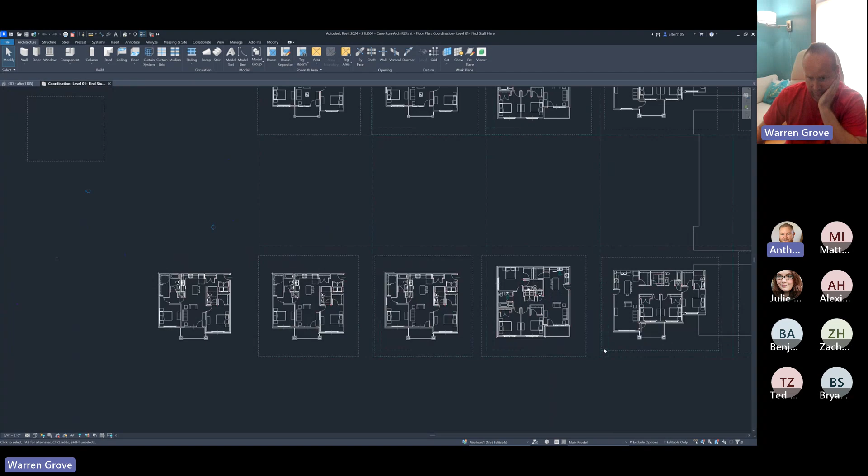100%. And if you're not sure where to source those elements you need for your project, you can always ask any of us. Please do not be afraid. We expect you on your first job to call us every single day. If we don't get calls every single day, we know we're all in trouble. So don't be afraid to call.

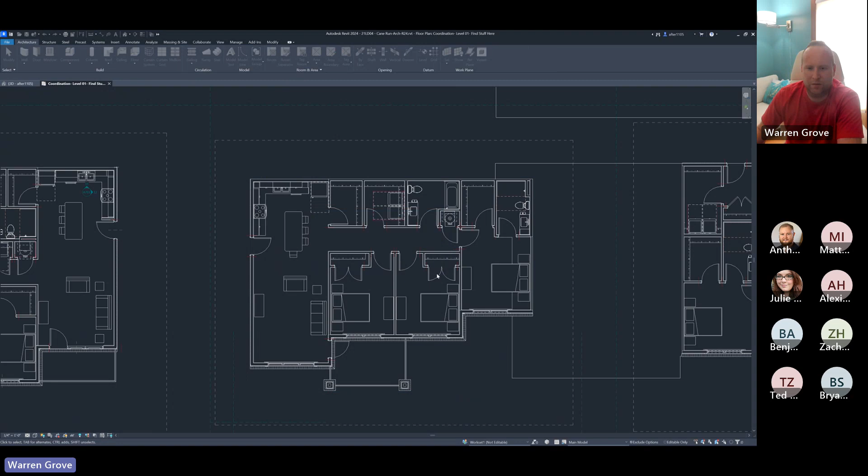Again, I'm gonna circle back to Anthony. How long have you been in this model? I own everything, I checked it all out. Revit asked, did you want to, and I said yes. Oh my God, you stop. Julie has discovered a way to keep me out of her models, and this is it - the trick is to own everything. Keep the old man out.

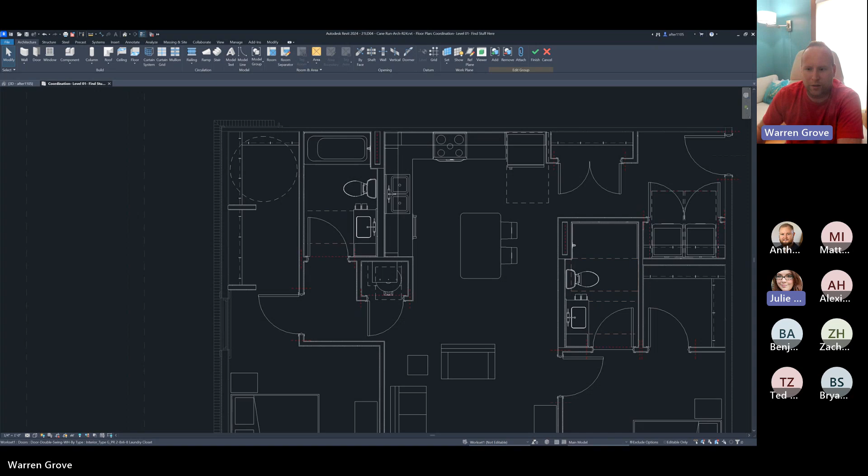This example right here, Julie's done a really nice job of getting us the right bathroom vanities, and there is garbage everywhere, even in our old drawings. I try to purge it when I find it, but given time constraints, that's not always possible. We love a perfect template, but Chris and I will never get off the phone, so that's also an ongoing problem.

But these are there, and if you find out we're not using them, let us know so we can get that fixed, because vanities - you would not believe how much a bathroom vanity can cause problems. It's unreal. Yeah, and we can give you the server locations for our bath vanities as well as our kitchen islands.

Any other questions? Absolutely, we keep - and you watch me go here - I do know they've done a very good job in the library. We have a garden style specific library. This is for my team, Chris and Ted use this all the time. I know we keep a lot of good documents. If you're looking for something, half the time it's in here. The other half of the time - Julie, where do we keep a little bit of special Revit stuff?

It's in current data and standards. Inside of this, is there a full set? Yeah. Am I just blind, where is it? It was the third one down - garden style, top, current data. I'm looking for a C. Garden style. Oh, sorry, my gosh.

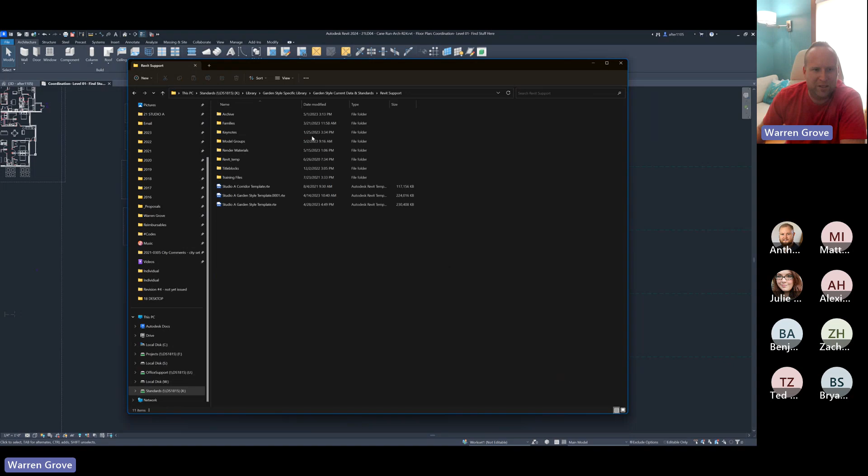No, you're fine. And then what do we have for Revit support? It's in the model groups for the bath vanities. I've lost this because I bookmarked it in Revit, so I no longer have to wonder anymore. But yeah, they're clutch.

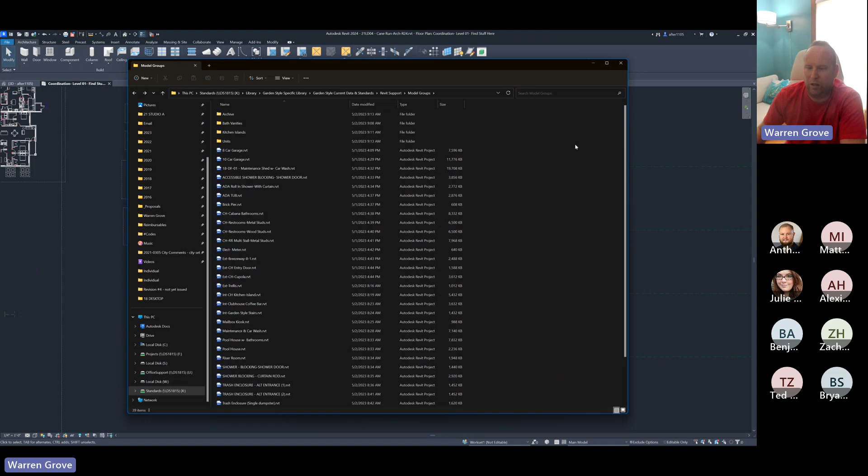They're great. Remember how we talked about insertion points? Those still need to be fixed for those, unfortunately, but other than that, they're pretty much perfect. We keep a lot of garden style Revit-y stuff just chilling out in here, along with a lot of other project management nonsense.

That's super helpful, thank you. Yeah, you're welcome.

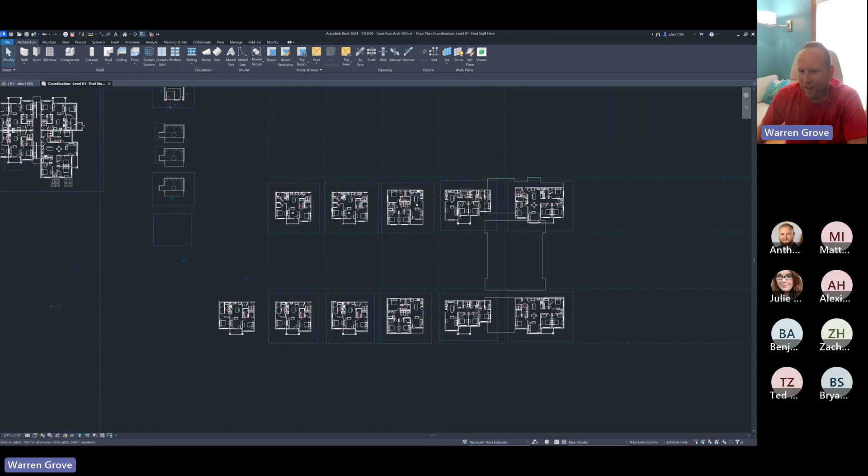All right, I don't think Chris is gonna rejoin, apparently he's out. Any other questions? Anything else anybody can think of for the group? Nothing from me. Awesome, okay.

Appreciate it, that's it, thank you so much. Yeah, welcome, yeah, mm-hmm, thanks guys, really appreciate it. Yep.